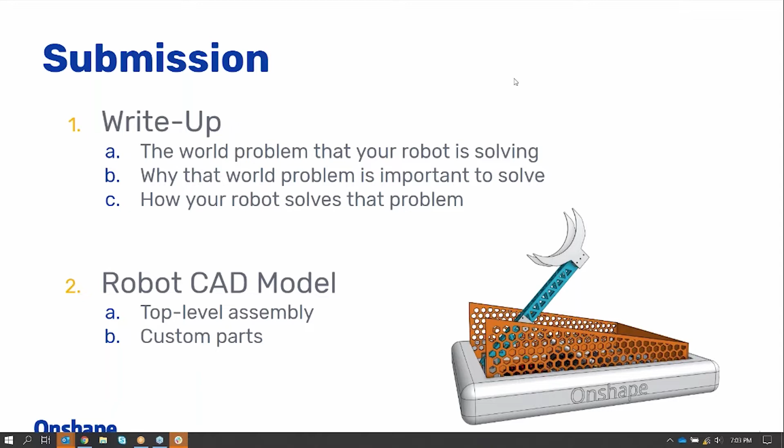And so another poll, if you're interested in sharing, we'd love to see what the problem is that your team is solving. I'm sure there's a lot of creative answers out there, so definitely, again, interested to see what people have come up with so far. And so you can still use that same system you used before. If you put where you're located on there, you can see that same poll. You just go to that website that's listed at the top, or you can text the answer if that's easier for you to answer on your phone.

Looks like we've got a few interesting answers. Garbage disposal. That's pretty interesting. Playground sanitation, that's definitely a big issue right now. I know a lot of people, I'm located in the Boston area, so a lot of people want to get out and bring their kids out while they're stuck inside. So having that would be great.

I love that, putting your email in there if you want to do an alliance. That's a great idea. I'm sure there's a lot of teams looking for alliances, so make sure to put that down if you're still looking for an alliance.

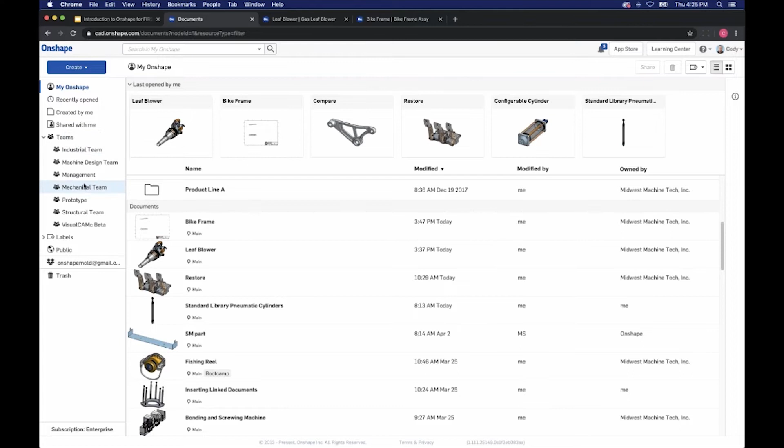So I would say that almost every FIRST team that we've interacted with is using Onshape teams as a way of easily sharing, because they can add everyone in the group and easily share that data with them. It also means that, as I mentioned before, it's a very effective way of filtering. I can search by things that are shared with a team. So teams are a very important aspect of Onshape, and especially so for FIRST teams. So that's the filters on the left-hand side.

One of the last ones that I want to mention is public. And the reason I mention public is a lot of people have shared designs publicly that can be very useful, especially for anyone trying to learn to CAD in general, but also FIRST teams. So definitely worth checking out the public resources. I'm going to go over this again later on, but you'll find them under the filter on the left.

So you click public, and one tip that I have for you is you can filter by likes, right? That is a particularly useful one, because the list of public documents is very long. There's a lot of public documents. If you really want to find the cool public documents, you can filter by likes and go through and find the ones with the most likes.

I would also encourage you, if you find any public models that you really like, to add a like, just to help us kind of curate the list, so to speak. So that's the public models, a very important resource for anyone new to Onshape. There's a tremendous amount of open source design here. And even if you're just looking at it as a tool to learn how to create certain shapes, this is a valuable resource for that.

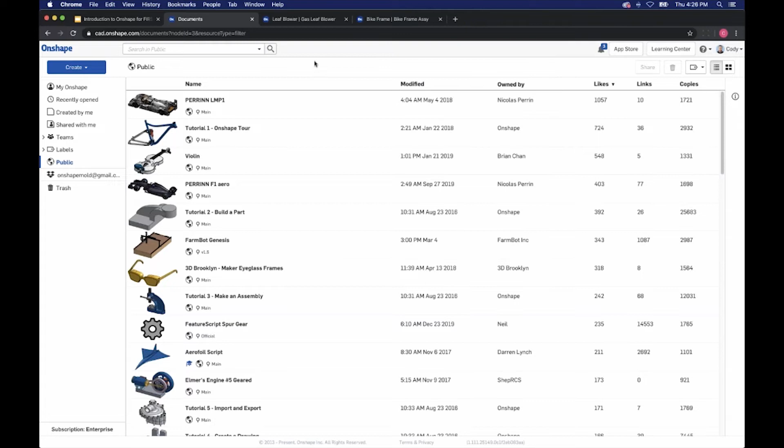All right, moving on. What I'd like to do is dive into a document and get started. So let's go back here. And you can see I have multiple tabs at the top. So I have a Documents tab, but I also have a tab here for the leaf blower. And if I switch tabs, you can see I've already opened this particular document.

What I'd like to do is go over various aspects of the interface. So, for example, starting at the top, the document toolbar, probably one of the most important pieces of the interface, spans the top. And it has things like changing the units for your design. So if you default to the wrong unit style, you can change that. Custom metadata, if you're adding metadata to your designs. Printing, renaming the document, all those kind of administrative functions.

You also have versions and history. Versions and history is, we're going to go over in just a bit, kind of the underlying architecture of Onshape. You'll find that there's no save anywhere in this interface. In Onshape, we don't worry about saving like you would in a traditional system. So everything that you do is automatically saved.

So we have versions and history, which is very much like an audit trail, lists everything that's ever happened to the document. We also have the ability to create a version, which in Onshape is like a snapshot of the document at that moment. So if you think you want to come back to the design at some point, you could do that with a version.

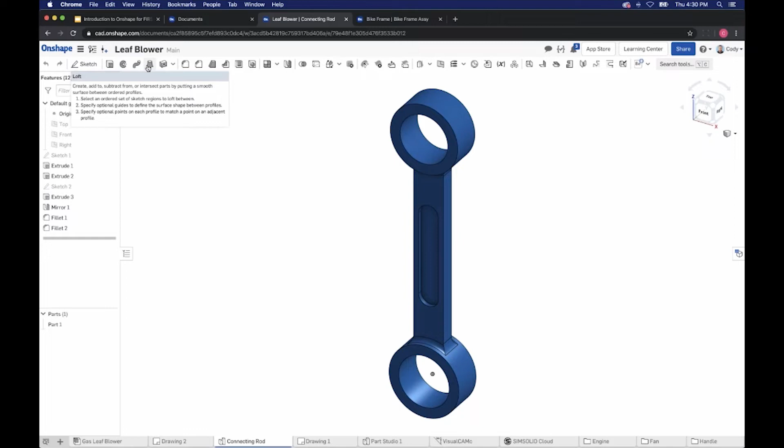But the important thing to stress is the toolbar will change depending on what you're doing. So if you're in an assembly, you'll see the assembly icons. If you're in a part studio, you'll see the part icons. If you're in a drawing, you will see drawing icons, right? So that's the toolbar. It's always in the same place. It just changes dynamically depending on what you're doing.

Now, to the left of the interface is the feature list. In the part studio, this is the list of features that make up that part, right? And so if you're, again, familiar with many of the parametric CAD systems that are out there, this is a familiar concept. You have sketches and features that make up the various shapes of your part.

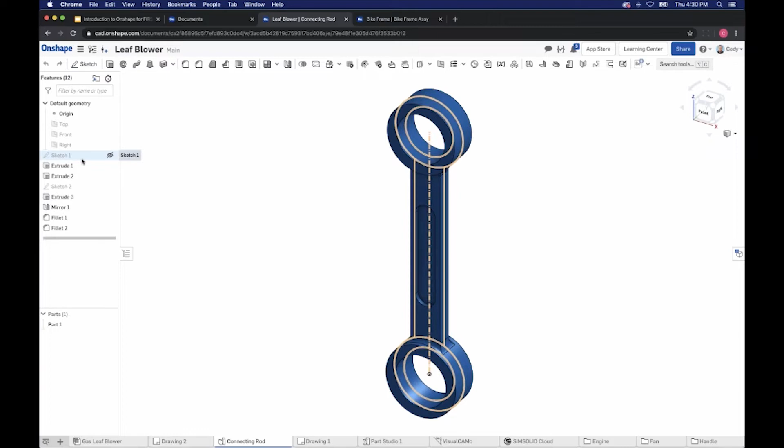So on the left-hand side, we have what we refer to as the feature list. It's very similar to other systems in that regard. You can right-click and edit and delete and rename and do all the things that you would expect to do. In the assembly, of course, we have the assembly list, right? So we have our various sub-assemblies. We have mates that make up those various sub-assemblies. So it's just the makeup of our assembly.

So part studios are really about the part design. Assemblies are about putting everything together and testing out the movement, the motion of the assembly, because you can't dynamically move things in a part studio. So you create your assemblies, you grab and drag, you test your motion out, you can animate and those types of things. But important to stress, that's the difference between the two.

Part modeling is done in the part studio. That's where you do your design work. The assembly is really about putting together all of those parts and testing out the movement between them. So, as I mentioned before, we have parts, assemblies. We also have, of course, drawings. Drawings are a very important final step for a lot of teams out there to communicate with their manufacturers, right? They can create a drawing, submit it, and have those parts made.

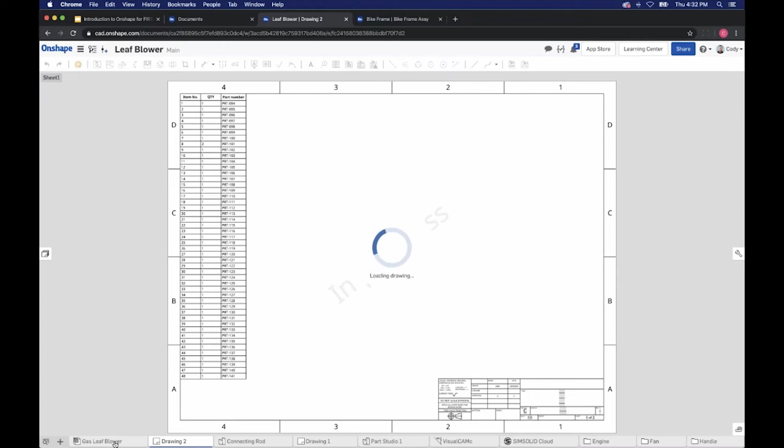So we have, of course, the drawing toolbar, which is going to vary from the assembly toolbar or the part studio toolbar. But the main thing to stress is just the fact that you're going to have parts, assemblies, drawings, various pieces of your document. Now, you may have noticed that at the bottom, I'm going between various tabs, right? So I have these tabs across the bottom. As I mentioned before, the document, you could think of it as a project container. It's not an individual thing.

So just keep in mind, you can have the entire robot in a single document. Now, if your robot consists of several thousand parts, you may split it up a little bit further. But keep in mind, for many users out there, I think that a document is a good starting point for containing that robot. Now, in this example, my project is a leaf blower. The top level assembly is a leaf blower.

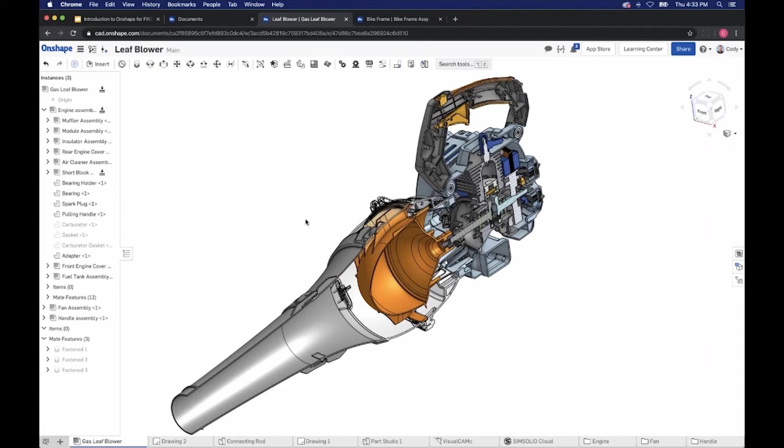But I have drawings, I have individual pieces, I of course have sub-assemblies and folders, and they're all accessed via the various tabs across the bottom. So that's the important thing to stress: this is how you get to the various pieces of your sub-assemblies. You just left click the various tabs and go between part and assembly and drawing. Now, it's not just part, assembly, and drawing.

You can also import data from other CAD systems. So this is an imported SolidWorks part, but it could be an Inventor part, it could be Creo, it could be CATIA. We import a lot of different geometry. So if you're interested, just check out our help, do a search for imported formats. It will bring up a long list of all the formats that we support. So I mentioned importing SolidWorks parts, but it could be Inventor, it could be other systems.

We also have the ability to import things like PDFs, right? So you can actually import a PDF and store it inside the document. This can be useful if you have maybe brochures that you distribute or just any kind of miscellaneous project-related files, because it's easy for me to import and store as a tab in the document. But just keep that in mind. It's parts, assemblies, drawings. They're accessed via the tabs on the bottom. You can import anything you want into a document.

So if you want to import files, PDFs, spreadsheets, you could do all that, right? And you could do that via the plus icon in the bottom left corner. So you click the plus icon, you'll see this option to import. This is also where you can, by the way, create new parts, new assemblies, new drawings, and build out your robot project. Right? So that is the high-level overview of the various pieces of the interface. One last piece that I want to mention is on the right-hand side.

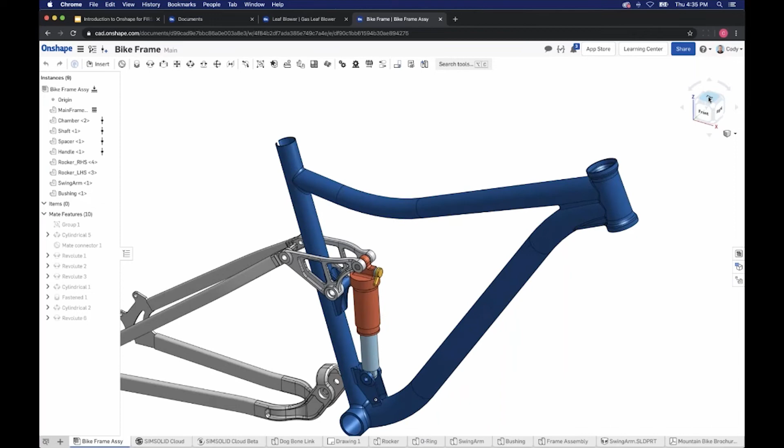That's the view cube, and it does what you would imagine. It allows you to go to various views very easily, rotate those views around if you want. So if you're just looking for standard views, you can easily go to them. But the most important thing here is the view cube drop-down, where you can choose to turn on section view. You can choose to show shaded without edges, or show hidden edges visible, in terms of your display

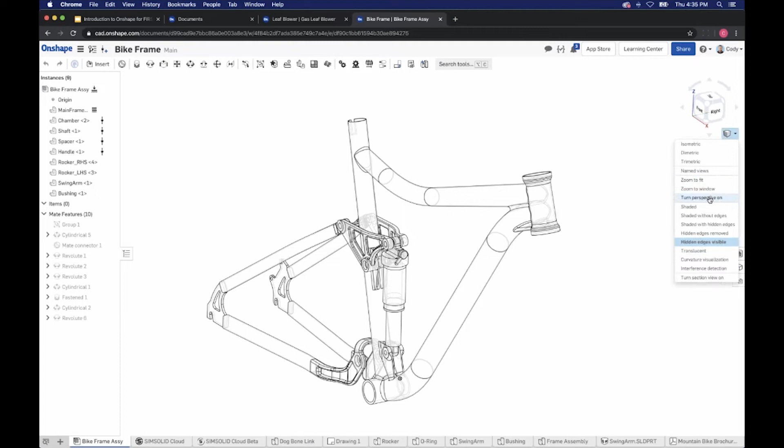style options. There's options for interference detection. If you want to know if your robot's pieces are interfering with one another, you can do that. That's all accessible via this view cube menu.

The last bit of the interface to mention are these tabs on the right. We have tabs for bill of materials. We have tabs for configurations. We have tabs for generating exploded views. Unfortunately, we won't have time to go into those now, but that's where you access all those various pieces. So if you're interested in exploded views or the bill of materials or any of that kind of stuff, this is where you find those pieces in Onshape.

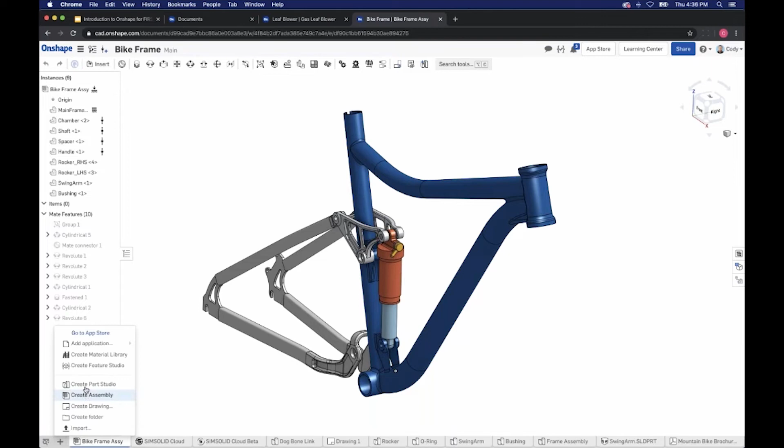All right, so I want to get into just a few minutes of creating a new part, and then I want to get into some of the things that really set Onshape apart, make it unique. So I'm going to create a new Part Studio. So I'm in my bike frame document. I just created a new blank part. I have my default planes, top, front, and right, and I'm ready to start sketching.

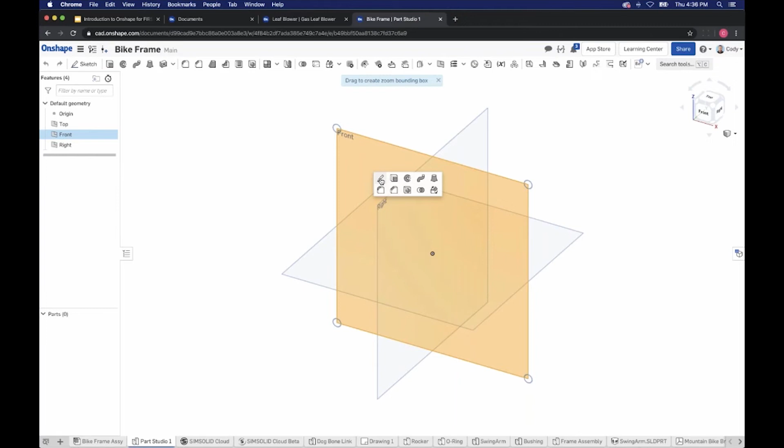So I'm going to left-click the front plane, and I'm going to use a keyboard shortcut, the S key, to bring up the sketch tool. Of course, I could just as easily use the toolbar at the top. And notice now that I'm in a sketch on the front plane, the toolbar has again changed to sketch icons. So again, the toolbar will change depending on the environment you're in.

Now, one very important lesson that I would give to anyone out there is Onshape is very much dependent on the right-click menu for a lot of things. And so what I often tell people is if you're trying to find something, you want to know how to edit, delete, rename, move, anything like that, try right-clicking on that thing. And chances are you'll find a context-sensitive option. And this is a good example.

I want to rotate normal to the front plane because I'm on a sketch, I'm on the front plane, but I want to rotate the model so that I'm looking straight at the front plane. That's a command we refer to as view normal to sketch plane. And you can access it by right-clicking anywhere in the empty space.

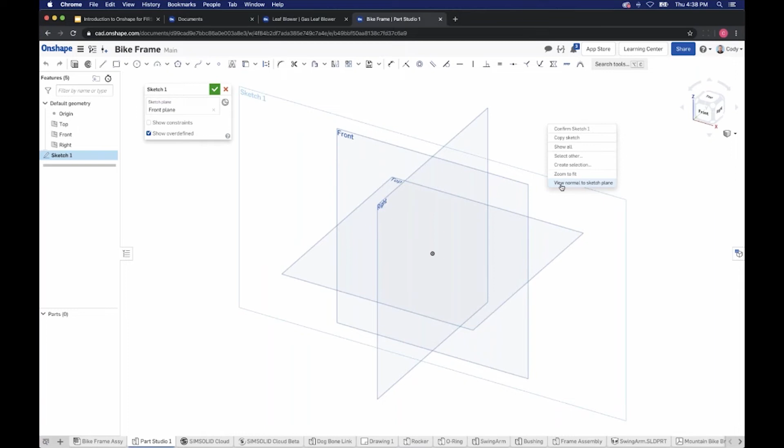But the big lesson I would give to anyone is the right-click menu is very important. Right-clicking features, right-clicking parts, right-clicking mates, right-clicking tabs, everything. It has a right-click context-sensitive list of options. So just keep that in mind. It's a very important piece of the interface in Onshape.

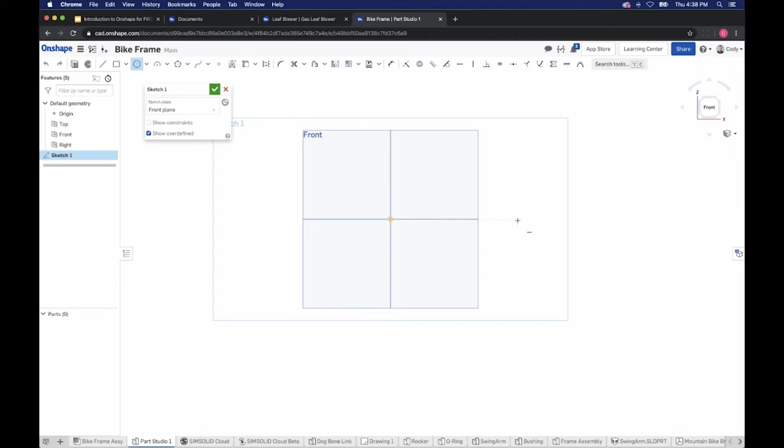So from here, I'm in a sketch. I'm ready to start sketching. I'm going to, again, use a lot of the shortcuts that Onshape gives me. So you can see I get all these snaps to horizontal and vertical. In this case, I want to place a circle right on the center. So I just left-click, and now I have my first circle in the graphics. I could do that one more time on the right-hand side of that. Notice I get that horizontal snap. I can, again, left-click, and now I have two circles in the graphics.

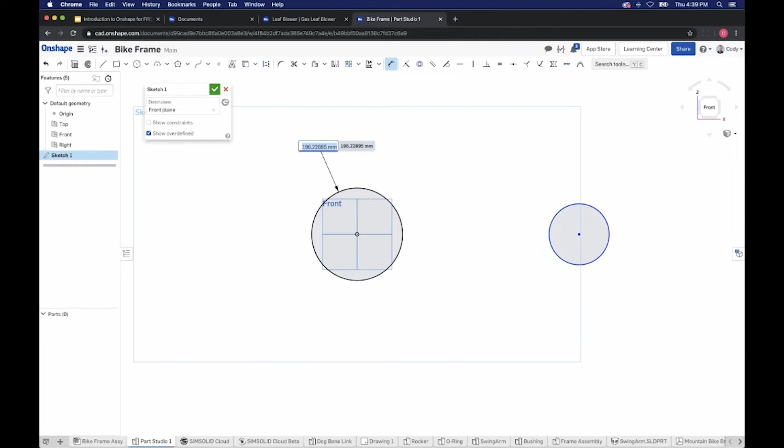Now, once you've started to add geometry, you'll want to, of course, add dimensions to it. And as I add dimensions, you'll see I get visual feedback as to the level of definition in my sketch. So if I add a dimension to this circle, let's place that dimension, and I type in 25, you'll see that the circle on the left turns black, while the circle on the right is still blue. And it's a visual cue that the circle on the left is fully defined, while the circle on the right is underdefined. And so it's just meant to be little visual cues.

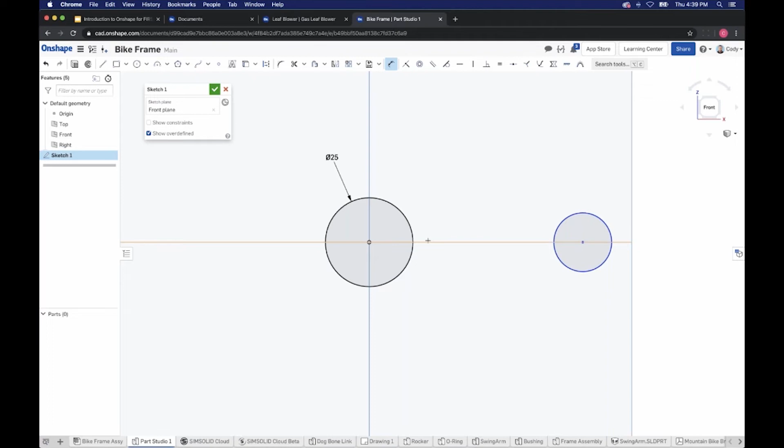That's not unique to us. Many other CAD systems have it. But I point that out because it's something many people look for. So Onshape itself has the Part Studio, assembly, drawing features that you're used to. If you've come from some other parametric CAD system, you can build the parts, build the assemblies, build the drawings, all that you need to inside of Onshape.

And really, it behaves in a lot of ways at a simple level, a lot like other systems. There are a lot of little things that we've done that are different, but one of the big things that we've done that is different is how we handle collaboration. And I think this is a really important point for any FIRST teams out there. One of the most important things you're going to need in these situations is to collaborate effectively, to have everyone on the team on the same page.

What's different about us is we're not using files, right? So if you create a part or you create an assembly or you create a drawing, you're not creating new files for every part or assembly or drawing. And so you're not emailing someone a file and then they email the file back, or you're not using Dropbox or Google Drive.

You can share just like in Google Docs, right? So if you've ever used Google Docs, there's a big share button. You click share, you type in the person's email address, you define their permissions, and it allows them into your document, right? So you're not sending someone a copy of your data, you're allowing them into your document. And that's kind of how Onshape works.

You click share, and it brings up the share permissions dialog. You define what kind of permissions you want to allow, right? And so in this case, I can say, well, this individual, C. Armstrong, has edit permissions. I want to give this person edit permissions. Or maybe I want to restrict it and say you're only allowed to view, right? You can't copy, you can't export, it's entirely up to you what kind of permissions or controls you give.

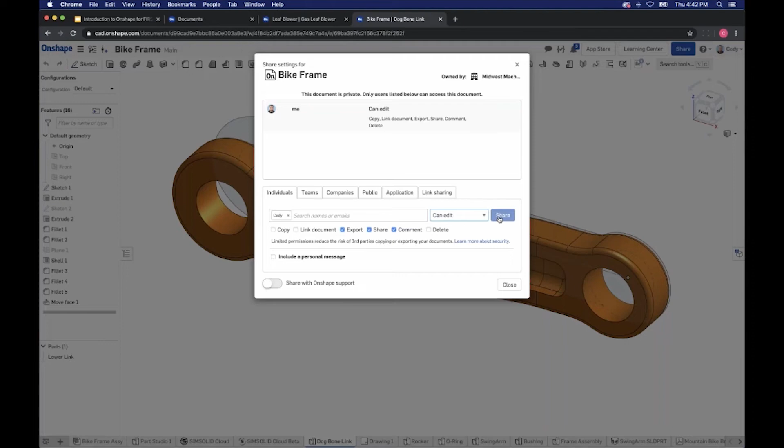But that's really it. You hit the share button, and that person is sent an email, right? They can open up that model and look at that model at the same exact time you are, right? And to show you this, bear with me for a moment here. I'm going to split my screens and show you two different users and what this looks like in real time. So this is two different people in the document, right?

And what I'd like to go over are how our collaborative benefits work. And one of the first that I want to mention is real-time collaboration. So let's just say, for example, the person on the left makes a change to this part. So they go in, they edit a sketch. Notice Onshape tells me on the right-hand side, someone is editing this sketch right now. So you see a little visual cue on this side that someone's here, right? It's just meant as kind of a cue, a warning. Hey, you might want to consider editing something above this in the feature list.

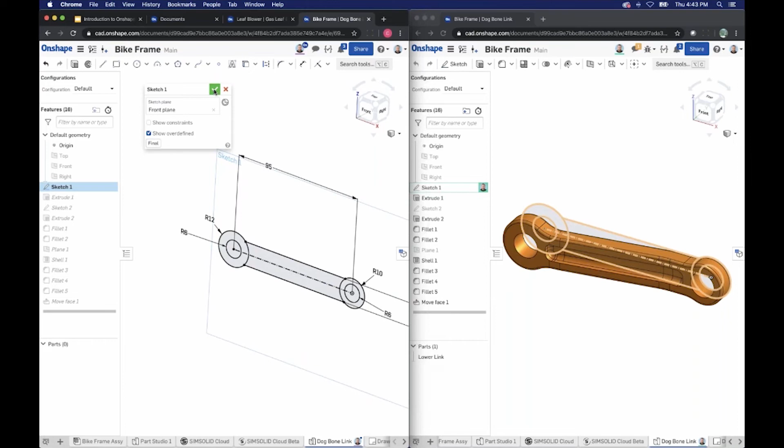You also see, of course, the cue at the top that they're in the document. So we're not sending data back and forth. We're both in the same model at the same time. Now, if I were to change, let's just do a simple change like change the length, right? As soon as I hit the green check, okay, you see it instantly update on the right-hand side, right?

Let's make it a more significant change. Let's change the appearance. So I changed the appearance. Let's call it blue. Okay. As soon as I hit the green check on the left, it updates on the right. So there's no save, there's no check-in or any of those kinds of things. That's what we mean by real-time collaboration. These people could be in the same room. They could be across the world. Any change made by anyone is instantly reflected to everyone, right?

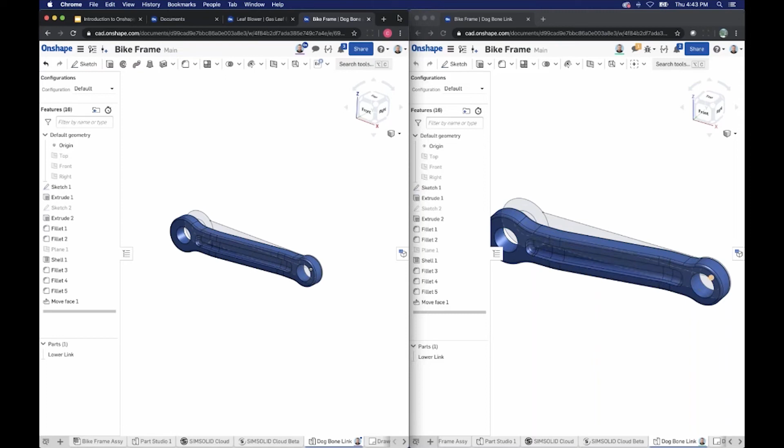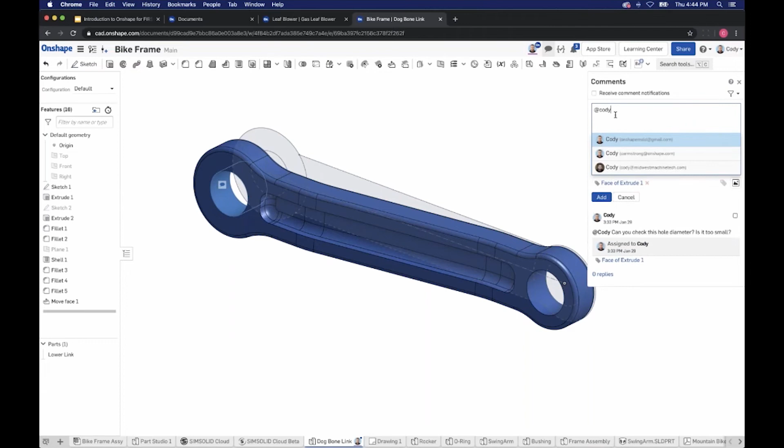Now, one more aspect of this is comments. I mentioned this earlier, but it's a very important thing, I think, for teams out there. If you right-click a face or a feature or just about anything in Onshape, you'll see this option to add a comment. If I click add comment, I can tag a person. So, @Cody, is this hole diameter correct, right? And I can do that and assign them the task.

They will get an email notification, they'll get a pop-up, and they can see the exact face that I clicked on, right? And so if I go back into that comment, I can see this is the face that the person clicked on. It even takes me back to the orientation that they originally created the comment in.

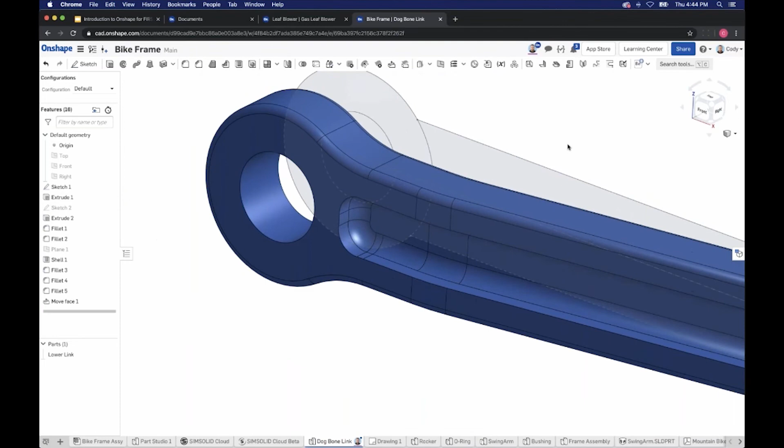So comments, in my opinion, are a very effective way to communicate, right? It's an easy way to right-click an edge or a feature or a part and say, is this the right part? Is this the right value? Is this fillet too small? Those are all questions that a lot of people would take screenshots, mark the screenshot up, email it to someone. All of that can be done with comments inside of Onshape.

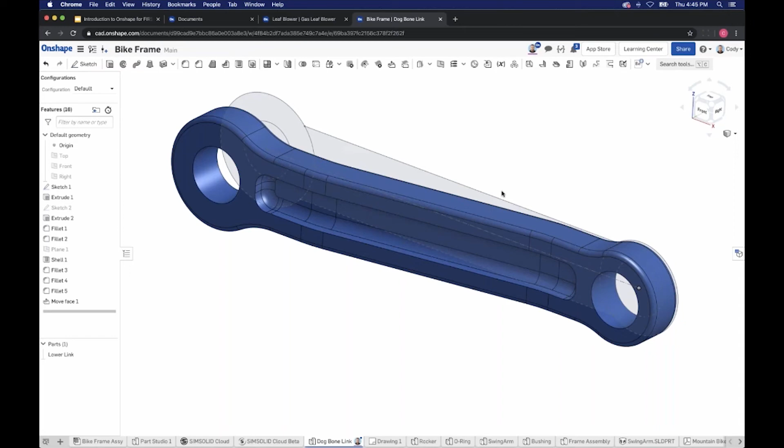Now, when I show collaboration, one of the most common questions that I get asked is, well, what happens if I don't like the changes made by someone, right? Or, how do I know who did what and when they did it? So as I mentioned before, in the versions and history, you can see every little interaction. So you can see this person at this time made this change.

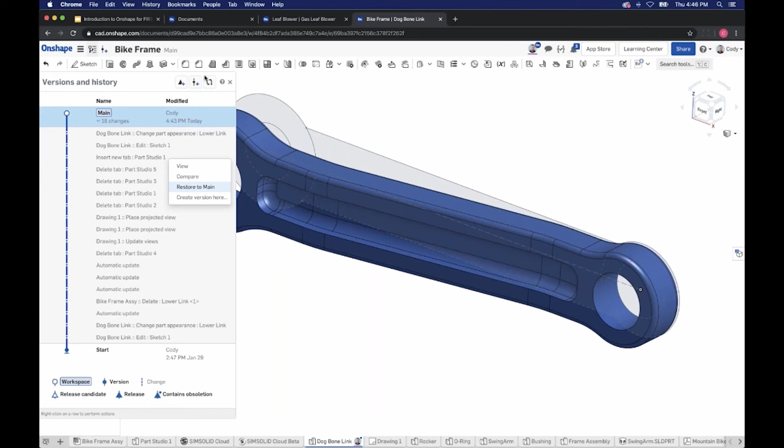If you don't like any of these changes, you can restore to any point in this history. So you can think of this like an infinite undo. Every time you hit OK to anything, it's added to the history. It's forever there, and you can always right-click and restore it. So that is versions and history, but I think collaboration in general is a very big part of using Onshape, especially for FIRST teams.

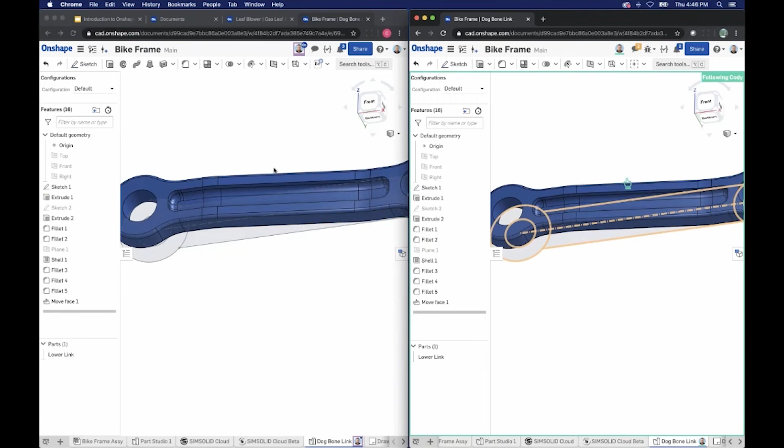Now, one more aspect of collaboration that I think I should mention is what we call follow mode. So if you're collaborating with someone and you see their icon in the top right, you can double click that icon and you're watching their screen in real time. So if you're on like a video conference with someone or a phone call and you say, hey, what fillet are you talking about that's too big? Well, I can easily go into follow mode and have them point out, hey, this is the fillet that's too big, because I'm looking at their screen in real time.

And a lot of times this replaces the need for a dedicated GoToMeeting or something to that effect. But it's a built-in tool. All you have to do is double click their social cue and it takes you into follow mode. You're seeing their screen in real time. So I think the combination of true real-time collaboration with comments and follow mode is really beneficial for students who are trying to build something collaboratively. It really makes a lot of difference when you compare it to kind of a traditional emailing file approach.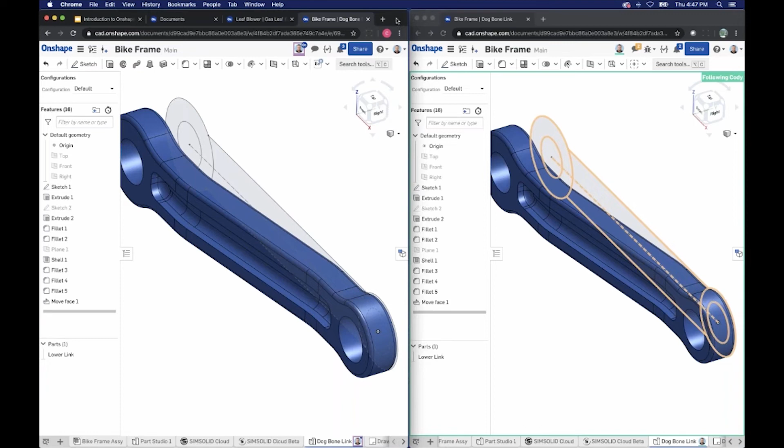All right, so I want to wrap things up here with a few tips that I have for FIRST teams. One of the first tips, and this is something that we have a dedicated webinar coming for, something Mackenzie mentioned earlier, but next week there's a webinar on using part libraries. There's a parts kit. There's thankfully some very dedicated robotics teams out there that actually made these kits available to everyone. In particular, I remember Team 1836, but I know there are others that have contributed to this. We really appreciate it.

Parts libraries, I can't stress that enough. Parts libraries really make it so a lot of the standard parts that you interact with in the parts kit, you don't have to model. You can just drop them in from those existing libraries. So that's probably one of the biggest tips that I give FIRST teams out there. Don't reverse engineer everything if you don't have to, right? So webinar on this soon, again, next week, solely on this topic, definitely worth checking out.

The next one is creating a team. And I want to take a moment to explain where you can do this under your username, right? So you'll have My Account. You have this option for teams. Here you can create a team and add individuals to it, right? So I can create a team and start to add my individuals to that team, right?

Now you have members and you have admins. Members can only work inside of the data shared with them, but they have no ability to add or remove other members. So you'll have admins of the team and you have members of the team. Think about who should control access to the team. That person should be the admin. But that's really it. You give your team a name, you add team members just by typing their email address, define their role, and that's it.

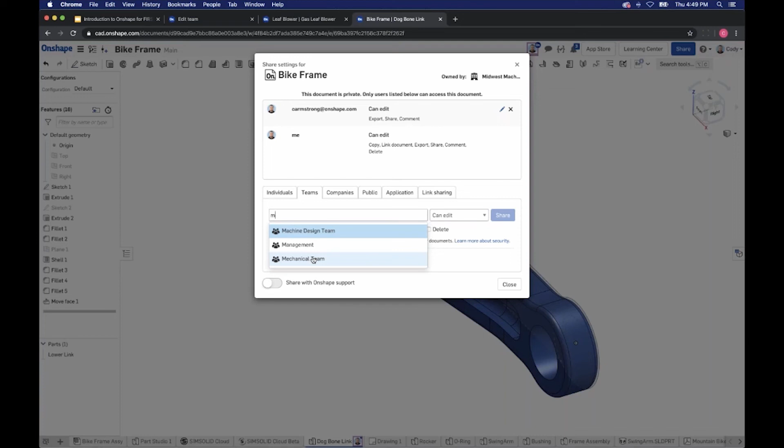But I can't stress this enough, especially if you find yourself continually sharing information. Typing in email addresses over and over again is not fun, and it's kind of tedious. So creating a team, and one of the biggest tips that I have along that same topic is creating a folder. I mentioned this before, but if you're working with lots of data from lots of different systems, you can import it into a folder and share the folder.

And the reason I stress this is if you're out there and you're working with hundreds of imported parts and they're all in different documents, create a folder, add them to the folder, share the folder, rather than sharing hundreds of individual parts. So these are all sharing mechanisms that I like to stress because that's one of the first questions we generally get from FIRST teams. Creating folders is just an easy way of lumping a whole bunch of data together in a folder and sharing it all at once.

And you can do that just by clicking create folder, giving it a name, and it will create a folder. And you can have subfolders. You can import directly into a folder from here. But the most important thing is when you click a folder, you can share it with your team very easily. That's an important thing, especially if you're working with lots of data and you don't want to share dozens or hundreds of things individually.

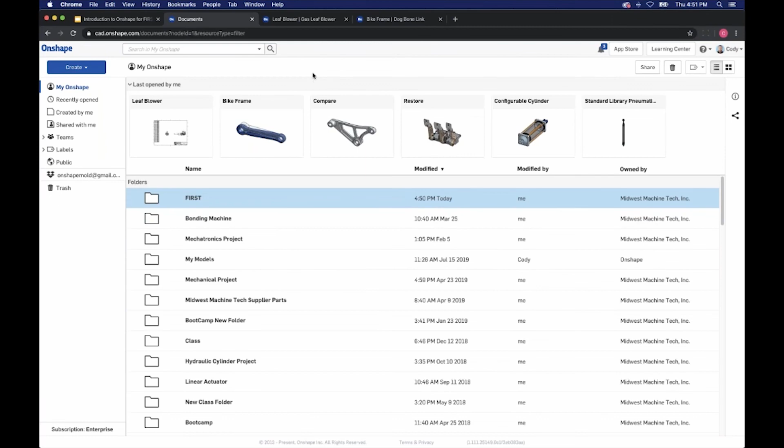All right, so that's the next two tips that I have for you. Create a team to simplify sharing, create and share folders to simplify sharing large amounts of data. So if you find yourself in a situation where you're trying to share a lot, add it to a folder and share the folder. The other comment is use comments. It sounds very simple, but it is an effective way to communicate inside of a document. I think it's especially helpful for FIRST teams.

The last one is one I mentioned very early on. Check out the public models. There's lots of great public models in Onshape. They're tremendous learning tools. You will find them out there, and I can't recommend it enough as a learning tool, as a way of understanding how people design in Onshape. So that is what I had planned.

And then I do have one more poll question I was going to ask. So I'll take the screen back, if I'm able to, Cody. Perfect. And so just another question: what Onshape feature are people most excited about for their team, what they're excited about learning?

Collaboration. I know for me too, my school was given Mac computers, so not everyone on the team was able to use CAD because we just didn't have the computers for it. So letting everyone on the team collaborate and having those different teams and different subsystems, letting everyone get set up to work together is something just great about this platform in particular.

The FeatureScript, that's something we didn't talk about, but definitely something people should look into. There's some cool ones out there for FIRST teams. Yeah, one page I'd recommend if you're interested is onshape.com/featurescript. There's a lot of curated custom features that are worth checking out. A lot of FIRST teams like the beams feature because it makes it easy to sweep profiles along a path, very common in robot design. Mm-hmm.